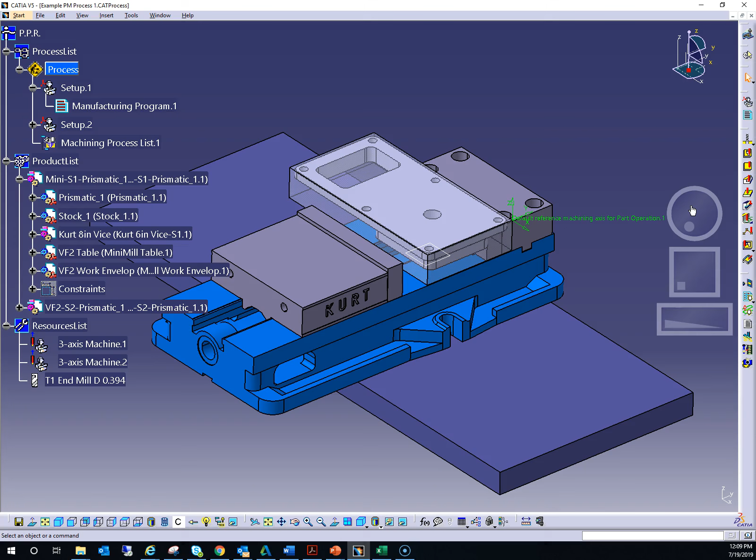One of the common operations executed on parts when machining is engraving, often used to put a serial number on a metal part. In this video I'm going to show you quickly how to go about creating the geometry one needs to do engraving, which is typically performed using the curve following operation.

So you've been working through the videos. This is the example you've been working on, which shows the part and stock in the fixture. What I'm going to do is open the part itself, because that's where the geometry for the engraving needs to be inserted.

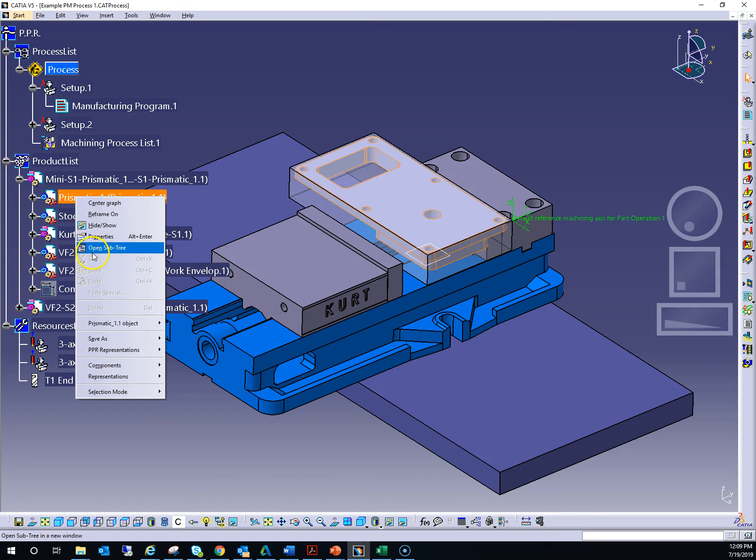We're going to go over to the product list and expand the first setup, assuming we're going to put some geometry to engrave, some text, maybe a pattern of some sort to engrave on the top, on this exposed flat surface of the part. I'm going to right click on the part, go down to the object part menu, and open this in a new window.

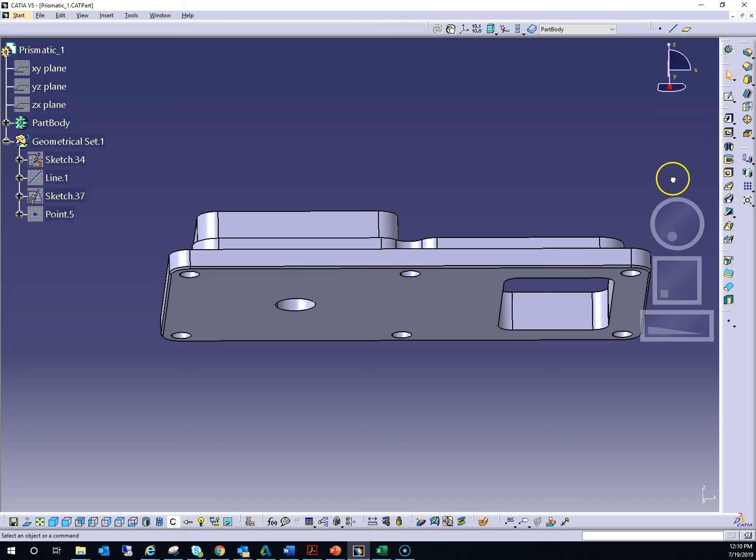So here's the part, and to get ourselves oriented I'm going to go into the top view. The x-axis is to the right, so if I flip the part like this, it's looking down on the part as an operator with the part fixtured on the machine.

Let's say we want to do an engraving of some sort on this. The easiest way to create geometry is to just create a sketch and use the sketching tools to do this. So what we would do is go into the part body and select the sketch operation.

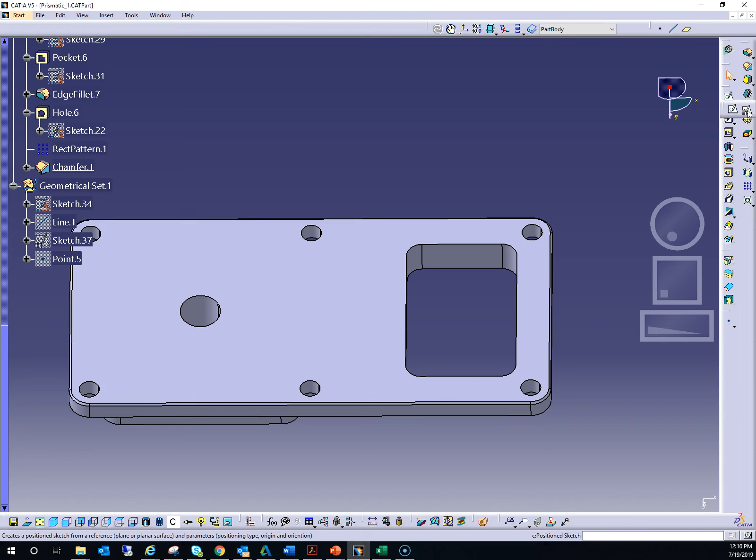I'm going to use a positioned sketch so I can control the orientation a little better. I'll pick the surface and then the origin type. So the origin is over here, which will keep things oriented. As you can see, the horizontal axis is to the right and the vertical is up. I'm going to accept this.

Now I have the part set up with the sketch plane on the top surface. Using any of these tools here, one can go about and create geometry that can be used with the curve follow to engrave.

For example, if I wanted to do some text, I could click on the line tool and simply draw a number of lines that represent this geometry that I want to engrave, the letter F, for example. I'm going to delete this line so I can do it again, to make sure the end points of the lines line up. There we go.

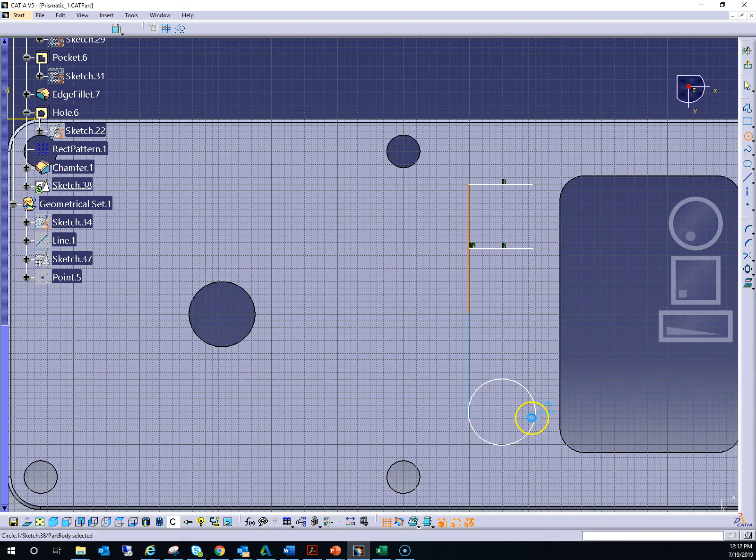Right now this is not constrained. If you wanted to control specifically the length of the geometry, one could certainly do that by adding dimensions, though it's quite a bit of extra work. I can also do circles too if I want. Anything that appears here on the sketching toolbar, the geometry toolbar, can be used to create geometry that's potentially part of what you might want to engrave.

So that's one way of doing it. I exit from the sketch, and now I have sketch 38, which can be used for driving the curve follow. If you have more complicated sketches or want to do more sophisticated lettering, it's probably not the best strategy, or it would take a lot of time and maybe not be as accurate, using what I just showed you with the geometry tools on the sketch.

In which case it is better to go ahead and use another type of program that can be more efficiently used to generate the geometry you want to engrave. In CATIA, you can actually use the drafting workbench to some extent to help you do this. So I'm going to transition over to the drafting workbench.

So we're going to go over to drafting, starting under mechanical design, or if you have it in your quick start options. Oops, sorry, I clicked the wrong one. Let's close this and do that again. Drafting. I'm just going to go ahead and select an empty sheet.

Now that I have that file created, I'm going to open it. File, Open, and I'm going to navigate to that file. Here it is, I'm going to go ahead and open it.

So CATIA created a new drawing, and as the main view, it set up that geometry for that Celtic knot pattern contained in the file that I downloaded.

It's here in a view, and if you move the mouse around and select, you can see that this is made up of lines and maybe some arcs. So basically a DXF file defines the geometry in terms of lines and arcs.

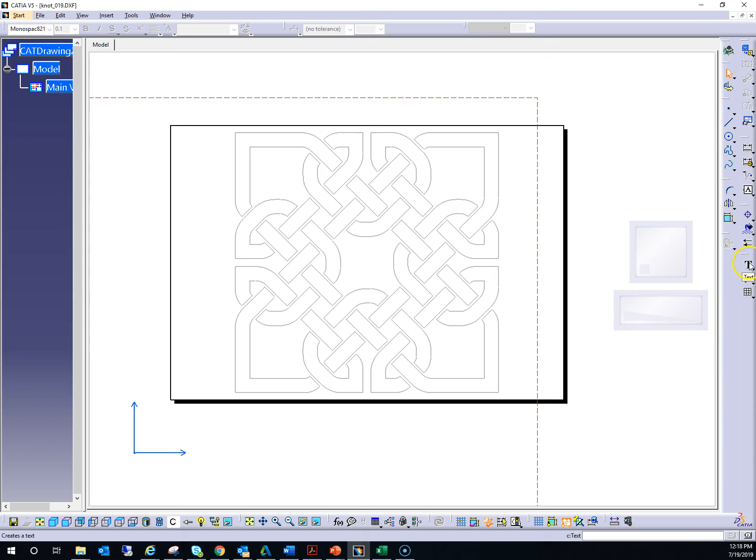The other thing you'd probably want to do, as I said already, is include lettering. One way you can do that is by using the lettering tool in the drafting workbench. So let's click on the text tool here, and I'm going to click down in the same view.

Let's just say we're going to add the first 4 letters of the alphabet, A. Once you input the letter, if you locate the text properties toolbar, which is this toolbar here, you can go ahead and change the size.

So I'm going to scale it up. And if you want, you can also change the font. Do exercise care in changing the font, because some fonts are very difficult to engrave. Try to keep it simple. It's normally the case when you're trying to do things like serial numbers on parts.

I'm going to move this around. Notice that as you move the text around, it jumps around. You have to hold on the Shift key to do it more smoothly.

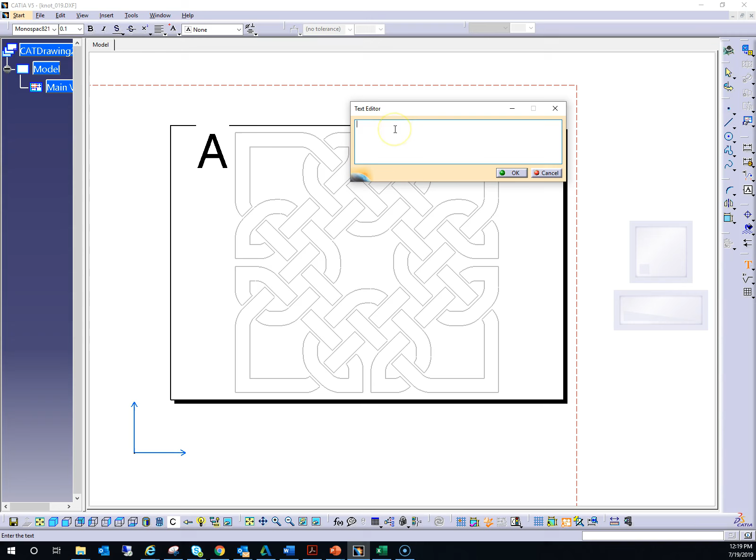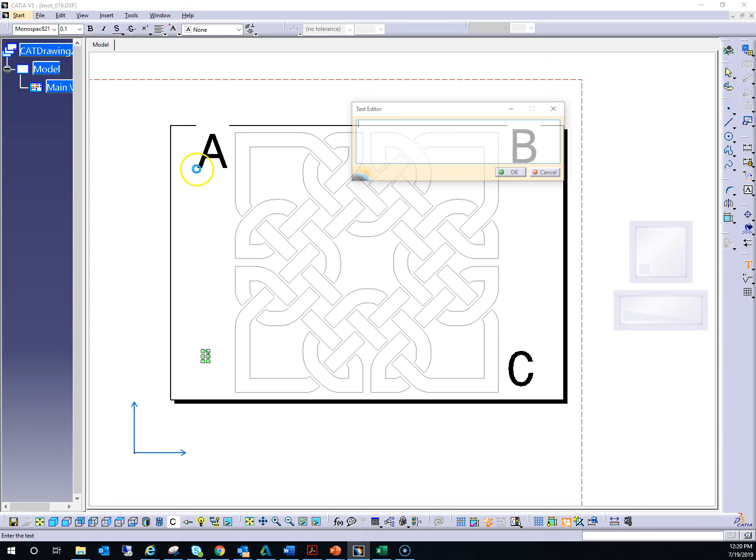So the letter A, and I'm just going to repeat this a few more times. Letter B. C, so just some texting at the 4 corners of the pattern. Letter D.

Okay, so now that we have the lettering in, notice that there's a difference between the letters and the geometry of the pattern that we imported. As I've shown you, you can click and highlight lines, but you can't do that with lettering.

So lettering as it's just been generated in CATIA is really what we call a pixel map, so it's just a bunch of pixels. The pixels are displayed in a manner that matches the font. Now you can't follow that with a curve follow operation.

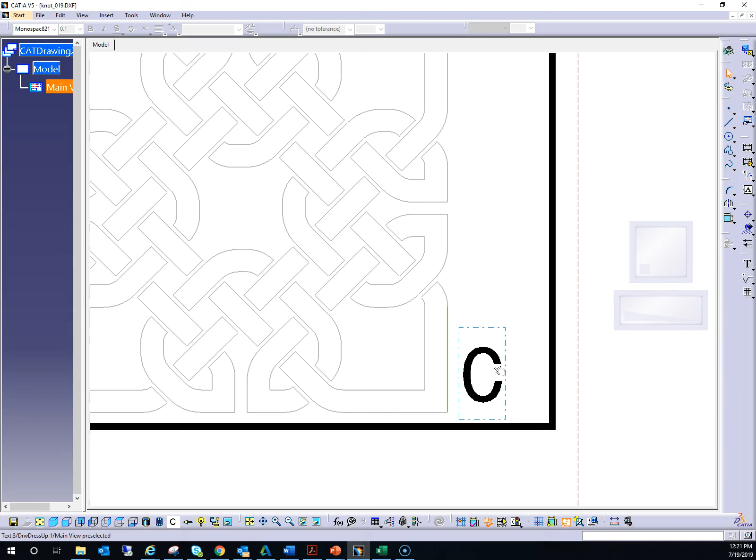So one has to go through an additional step to convert this type of text into geometry such as the pattern that the tool can follow. To do this, one simply saves the drawing that you've created, including what you've imported and the text you've added. So we're going to save this using save as, and we're going to change the save type here.

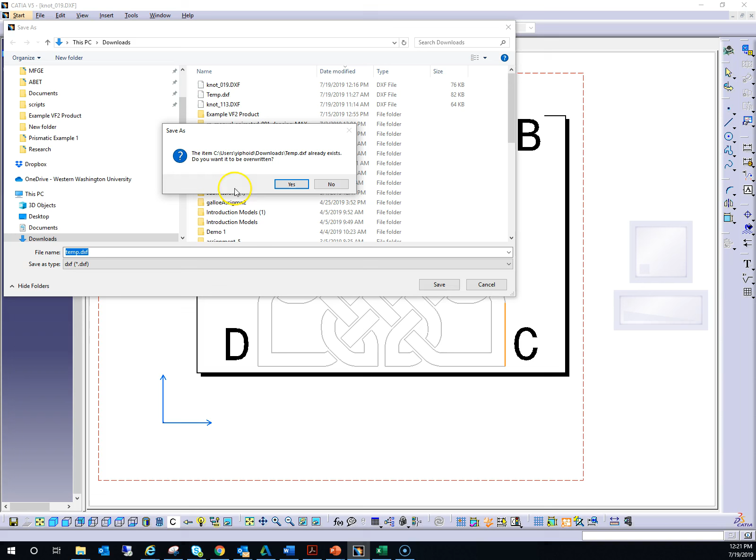From a .CATDrawing, we're actually going to output it as a DXF file. So let's go ahead and do that. I'm going to just type in the name temp, because it's just a temporary file. Actually I have one already, I'm just going to overwrite that.

So I've outputted everything to a DXF file, and then I'm just going to re-import it, just reopen it. File open, temp.dxf.

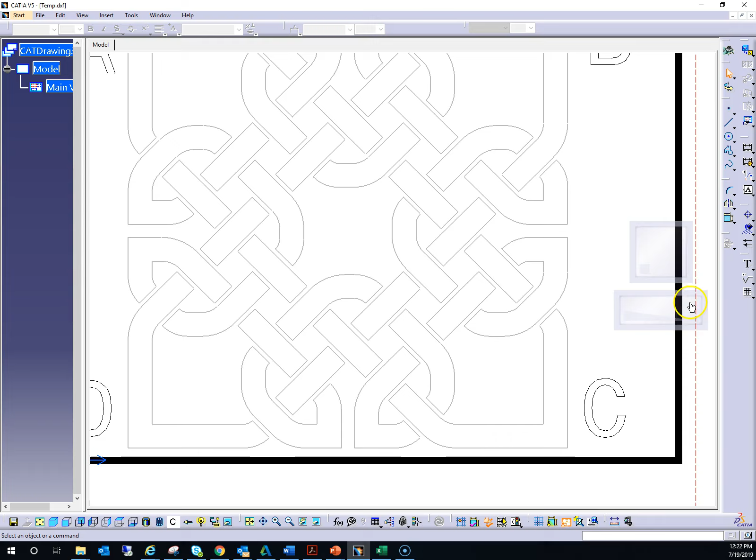So notice the difference now that I've imported the file. Those letters are no longer what I called pixel maps. They're actually now lines or combinations of lines similar to the pattern that we inputted, and this is what you need to be able to do a curve follow.

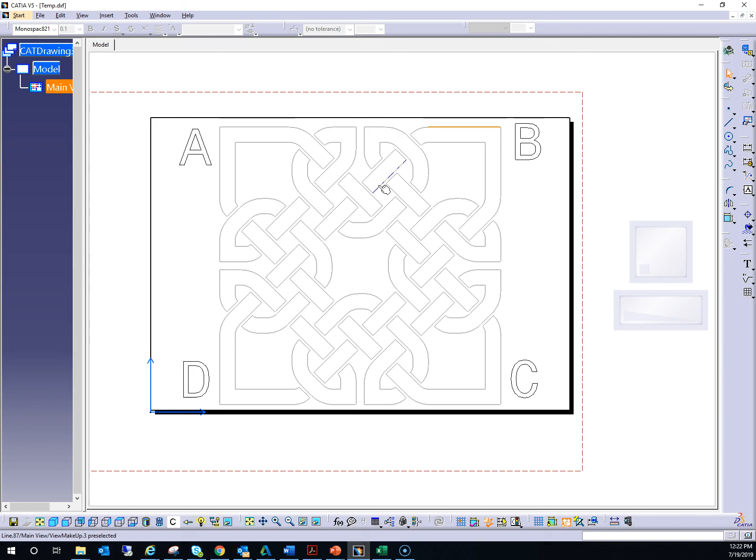So this is how you would bring geometry in. The question now is, how do you move this from where it is in the drafting workbench over onto the part? Well, the way you do this is you click on the view, either in the tree here or right-click on the border and copy it.

And then we're going to go over into our part. So here's our part. Make sure that your in-work object is at the bottom of the tree, or the part's highlighted as your in-work object. And then we're just going to do a paste, so Control V.

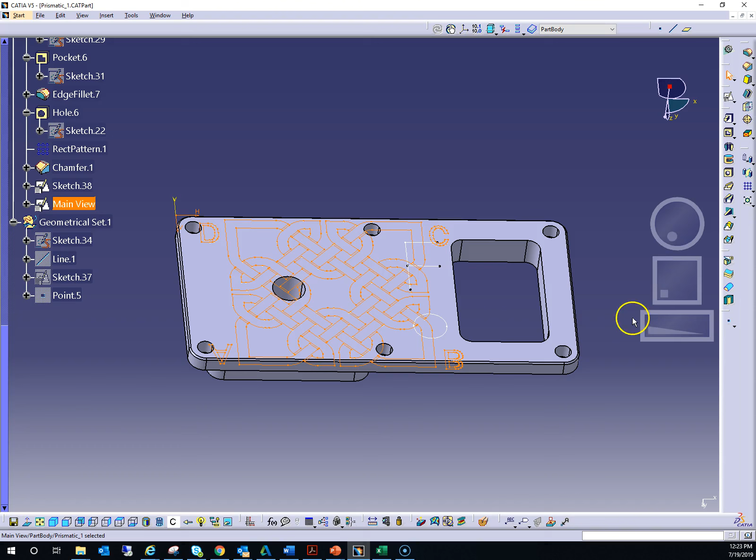And what happened was the view was inserted as a sketch. So you can see the view inserted, and the geometry that we imported and created on the drawing is now on that sketch.

Now if you look closely, you'll see that the orientation is not necessarily the way you want it. It's actually inverted. So there may be some things you have to do, and also the size may be larger than what you want. So there are a couple of things you need to do, or can do, to help set it up properly.

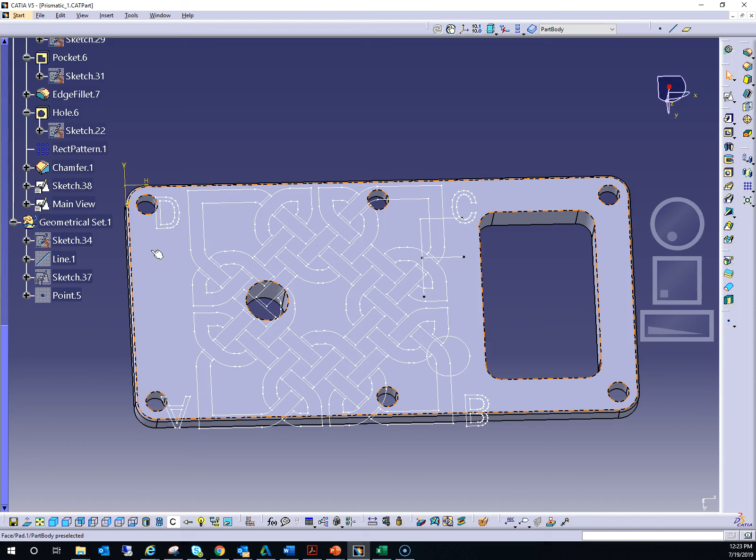The first would be to change the sketch type to a position sketch so that you can manipulate the sketch axes. You do this by right-clicking on the sketch - you may remember doing this in your CAD class. We go down to the view, main view object, and change the sketch support.

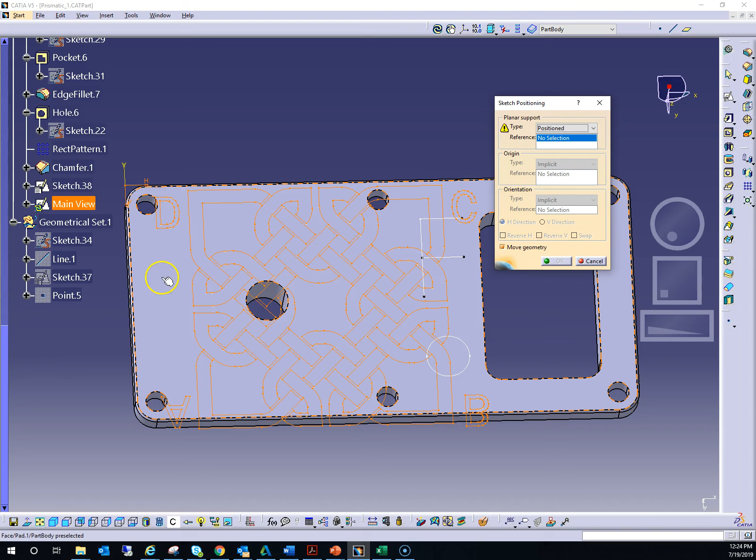Now in this case, the sketch support doesn't even indicate the plane that the sketch is on. So let's change this to a position sketch, and then we need to reselect the plane. So let's select this plane here. Notice that in doing that, the position sketch automatically flipped the horizontal and vertical axes.

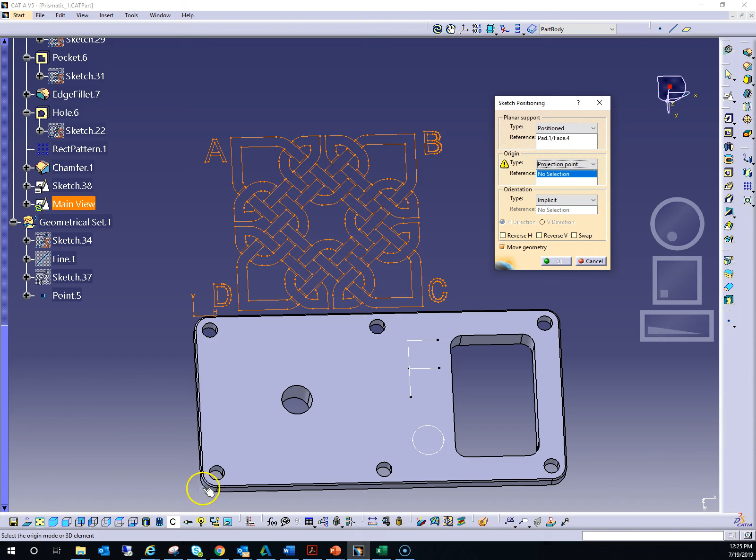To reposition the location of the sketch, we would come here under the origin, and instead of using implicit positioning, we change this to a projection point. There's actually a point here, Point.5. If you right-click and unhide it, we can use that to shift the origin of our sketch to that point. So that positions things more appropriately.

The size and scale is obviously still an issue, but for us to deal with that, we'd have to actually go into the sketch. So let's hit OK now that we've gotten things reoriented and repositioned. Let's just double-click on the sketch now to go into it.

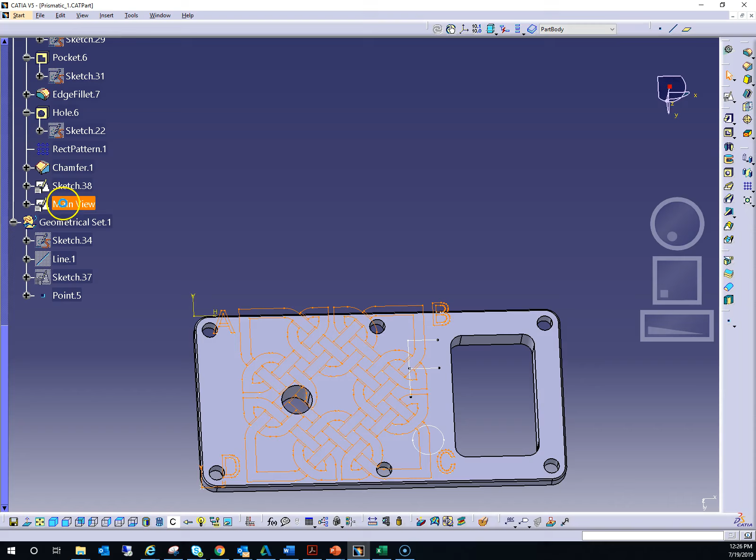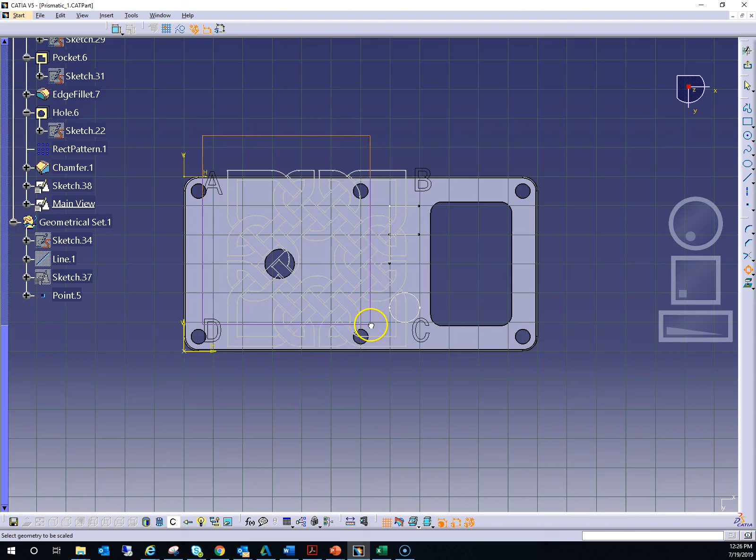What we have to do to change the size is use the scale tool. Remember the scale tool over here on the Sketch Tools toolbar - it's underneath these options here. So I'm going to scale, I'm going to draw a window around this geometry, making sure I grab the full pattern and the letters.

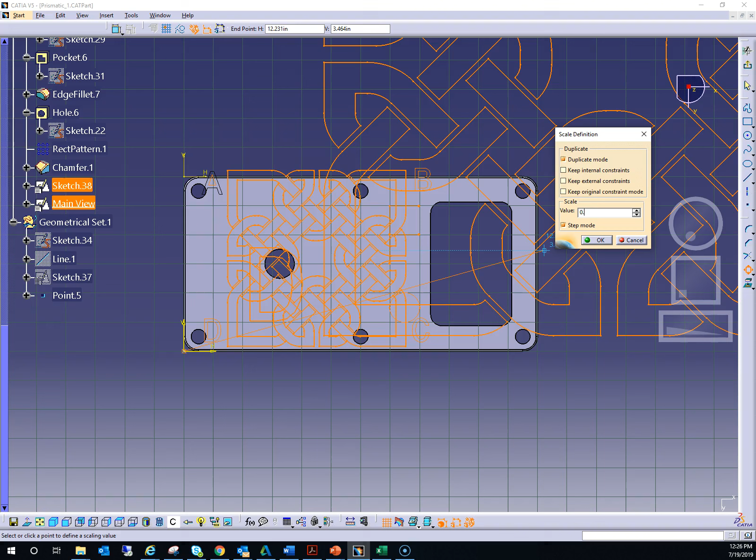For scaling, you pick a scale point. In this case, I'm going to just use the origin of the sketch. Then you have the option - there's a dialog box that pops up to help you. So you can either drag, or you can type in the scale you want to use. Let's say we wanted to scale this to three-quarters of the size, so 0.75. You can see what it looks like there.

So let's uncheck duplicate mode. What we do is just delete the original one and create the new scaled one. Then hit OK, and here's our new scaled engraving.

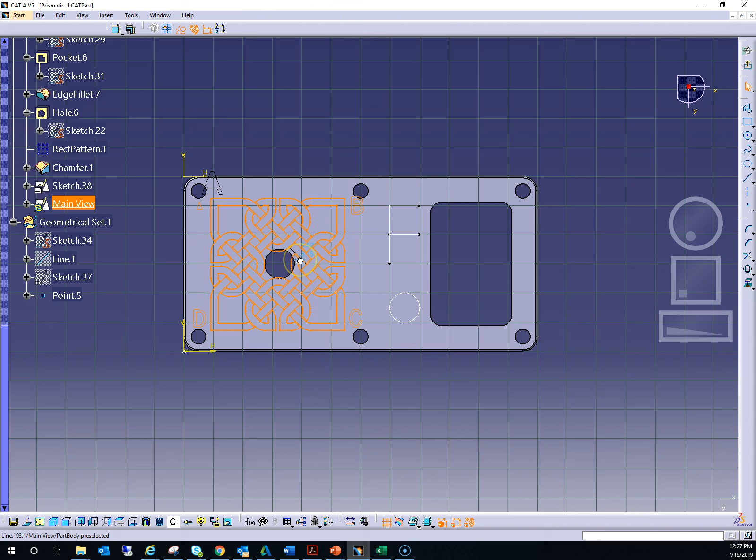It's still selected, so you can still move it around. Notice that it's not constrained. Notice that I missed part of the letter A with the scaling. So you can move it around by just clicking on it and dragging it.

So that's how you go about setting the sketch up - of course you exit, and you now have the geometry that you can follow with curve following to do engraving with. So that's a summary of how you go about setting up geometry for engraving.

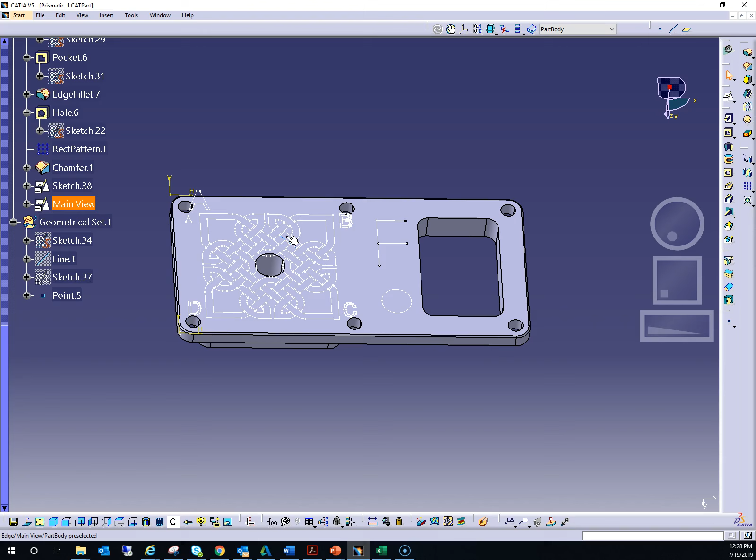Again, you can work directly on the sketch, such as what I showed you at the beginning. You can create complicated patterns and shapes using a drawing program such as Illustrator. You can download stuff from the internet. And you can also create text in the drafting workbench, but you have to export it as a DXF file and re-import it to convert it into line-follow geometry.